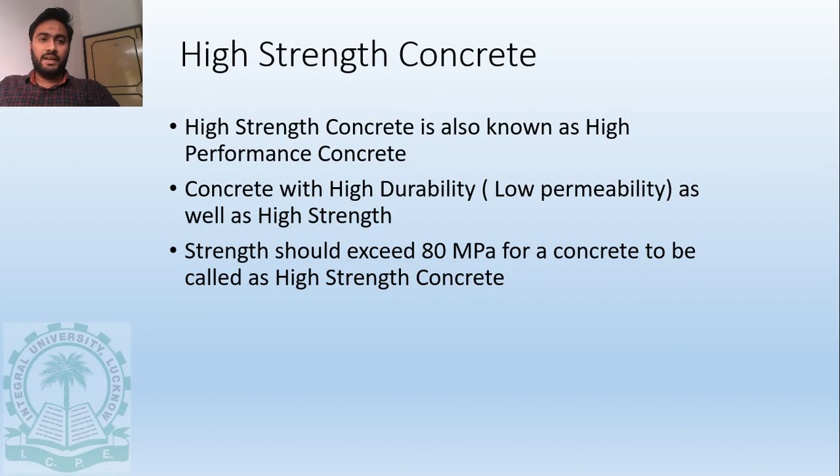So, what is high strength concrete? First of all, high strength concrete is also known as high performance concrete. So, concrete with high durability as well as high strength is known as high strength concrete or high performance concrete. So to call it as high performance concrete, it should exceed a strength of 80 megapascals. Okay. So the 28-day compressive strength should exceed 80 MPa. Okay.

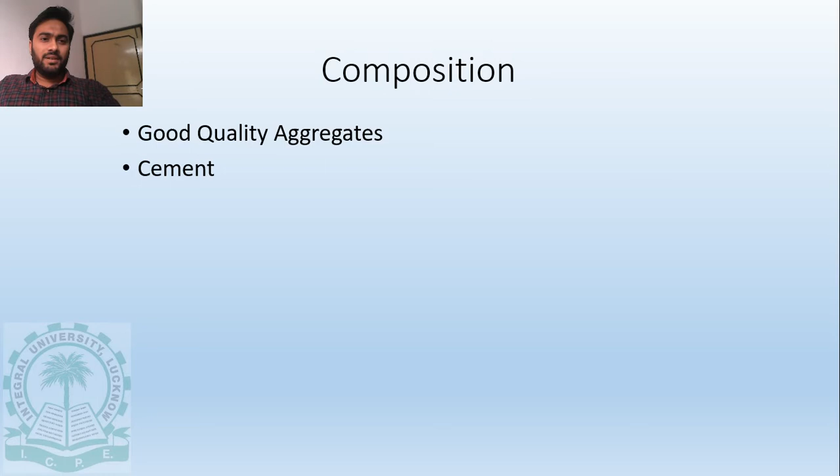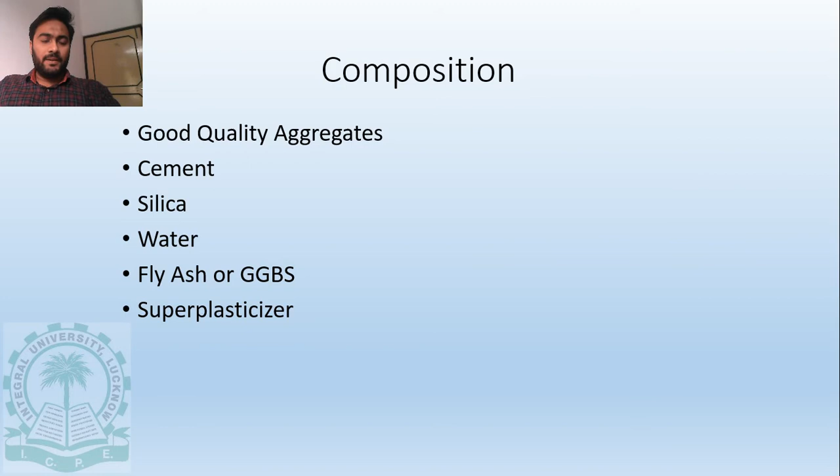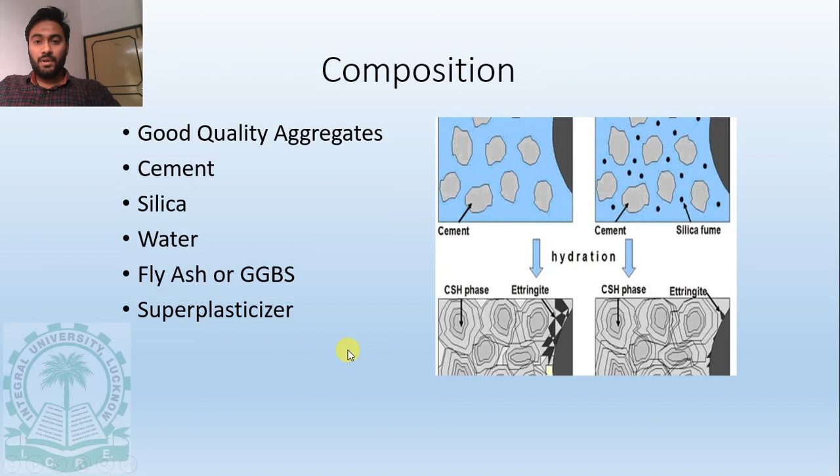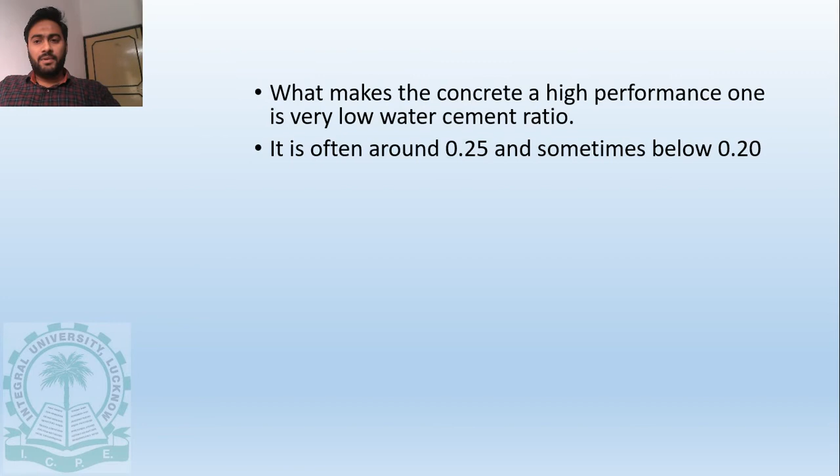the most important thing in such concrete is low water cement ratio. It is often around 0.25 and sometimes below it, also close to 0.20. And for this reason we always use superplasticizers. Okay, this is a kind of admixture we will discuss in unit 4.

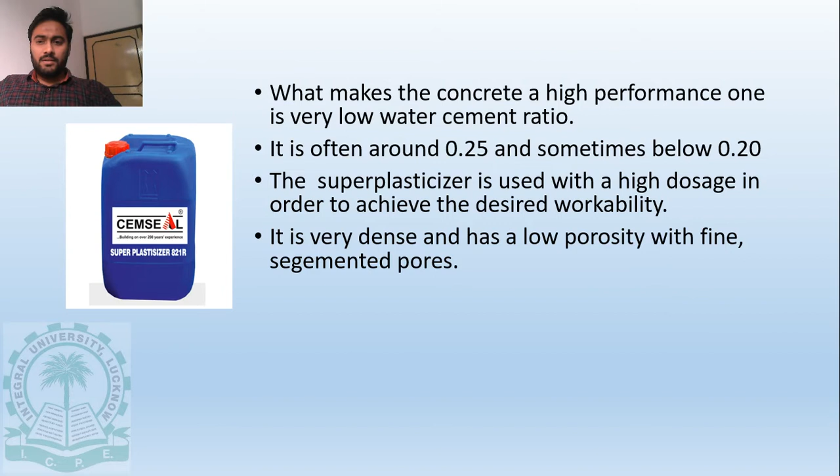Okay, so just understand it, it increases the lubrication of the concrete, so it increases the workability of concrete. As the water cement ratio is very low, the mixing of concrete or the workability is very poor, and to overcome such problems we use superplasticizers. Okay, this is a kind of admixture we will discuss in future classes. So it is very dense and has very low porosity.

Okay, so as you have seen, the water cement ratio is very low and not enough for full hydration of cement. So even after curing in water, a substantial amount of cement remains unhydrated. So even after curing, we have some cement which has not been hydrated, so it is still in cement form.

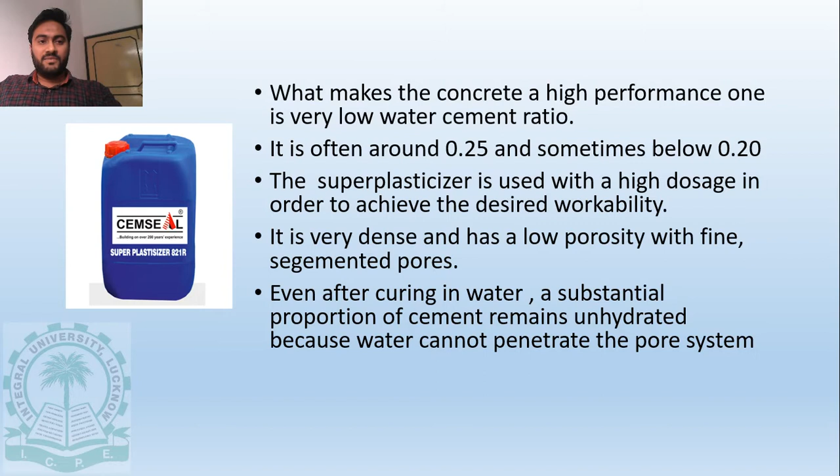So, what are the advantages of such concrete? The first advantage is that concrete column sections can be reduced in size, or if they are not reduced in size, the reinforcement can be reduced for the same size. So if you reduce the reinforcement, you save money, or if you reduce the column section size, you increase the floor area. So in a given room, if the columns are of small dimensions, you will have more area in the room. So obviously, advantages are there.

For example, let's take an example of a city like Mumbai. We do not have the luxury of space there, so we want structures in which very efficient utilization of space can be done. So we can use high performance concrete to have thinner sections of column, so the floor area is increased.

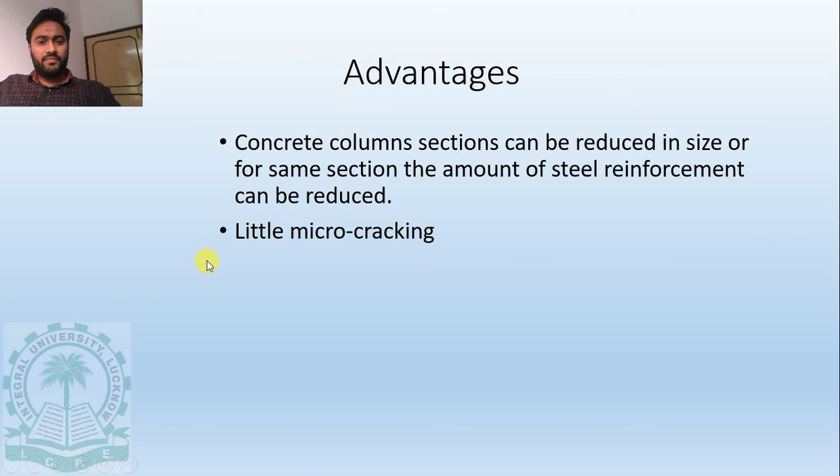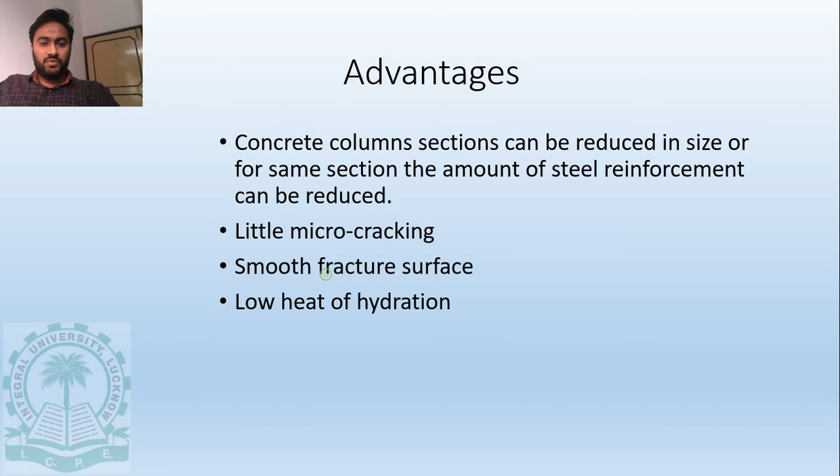So the next advantage is there is very little cracking, and even the fracture surface is very smooth. If you break it in two parts, the two surfaces exposed are very smooth. The heat of hydration is low. There is low bleeding and plastic shrinkage, and obviously because of these factors, the durability is very high. Okay, the structure will last for a longer time.

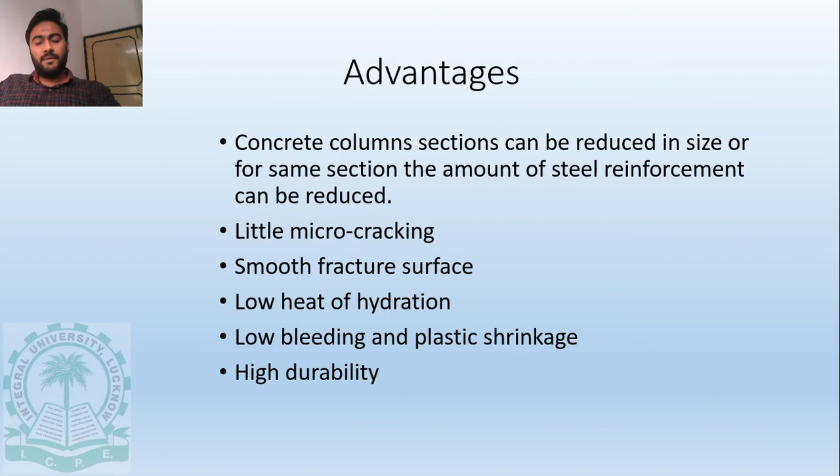So the next topic we have is fiber reinforced concrete. For short, I will be calling it FRC. So you can see FRC, fiber reinforced concrete. So it is made up of hydraulic cement, aggregates and discrete reinforcing fibers.

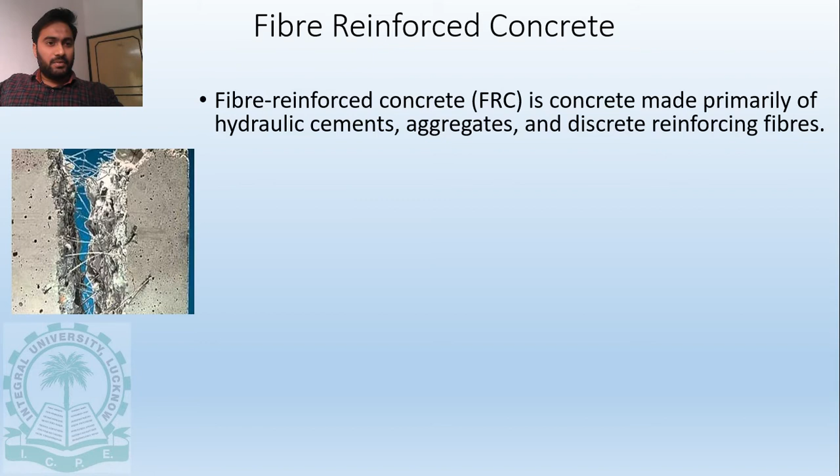Discrete reinforcing. So for example, in this sample, you can see this is the cement and aggregate thing, and then we have very small fibers here. Okay, this is called discrete. Okay, not in a proper shape, very randomly distributed and small in shape. This is called discrete particles.

So these fibers can be of different materials. For example, we have steel, glass, organic polymers, and even synthetic fibers we can use. Okay, so steel, you have to remember here, we already use steel as reinforcement in our beams and columns, and you will be studying RCC, reinforced cement concrete, in your next semester.

But this is not the steel which we are talking about. This is different steel we are talking about. I will just discuss in the next slide how it is different from the reinforcement we use in beams and columns. So naturally occurring fibers, for example, asbestos, vegetable fibers. Then we have jute. They can be used as reinforcement. Obviously, the mix is always cement mortar for the base material.

So if you use such fibers in a proper way, I say proper because you cannot use it above a certain proportion. So it's not that the more fiber you use, the better the structure. It is not like that. Up to a certain limit, the strength can be improved. After that, if you use the fiber, the advantages start decreasing. Okay, so if used properly, they can give long-term serviceability and other benefits also. Okay.

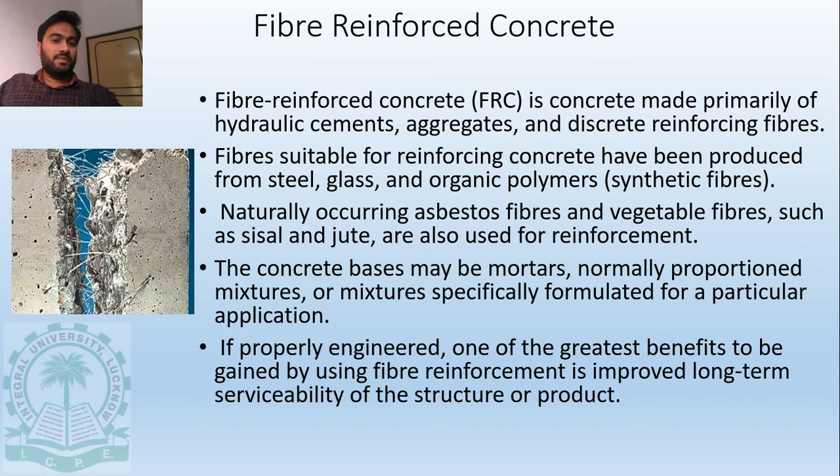So what is serviceability? You will again study this concept in your RCC, the serviceability of a structure. Let's say, for example, for how long the structure can be used, or it provides you essential value, for how long it is valuable. So if it cracks after a certain time, or it fails after a certain time, then it is not serviceable. Okay, so you will learn about these things in your next semester.

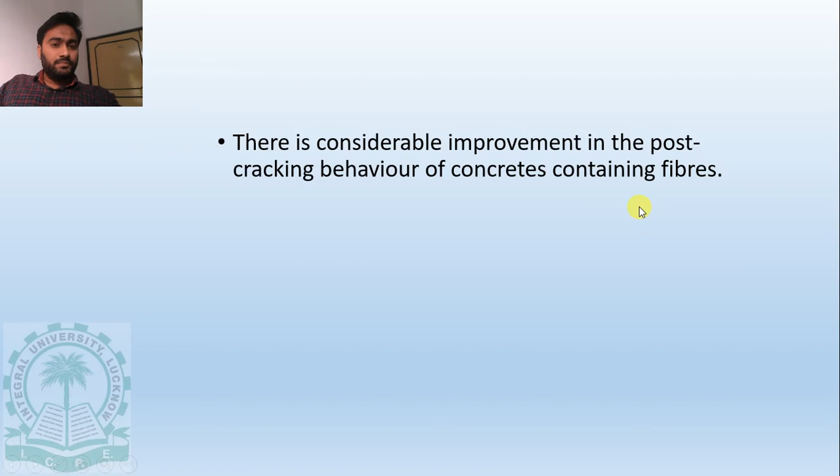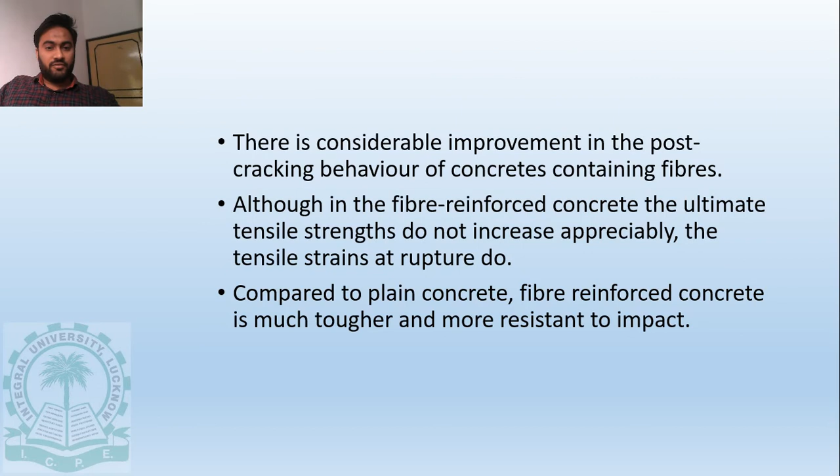So what we see is that using concrete fibers, there is improvement in post-cracking behavior. As you know, cracks will appear when you are using concrete due to shrinkage and creep. But post-cracking also, concrete having fibers has a better behavior compared to concrete not having any fiber. The point here is, they do not improve the ultimate tensile strength, but they do improve the tensile strain. Okay? And the structure is more impact resistant and tough compared to normal concrete.

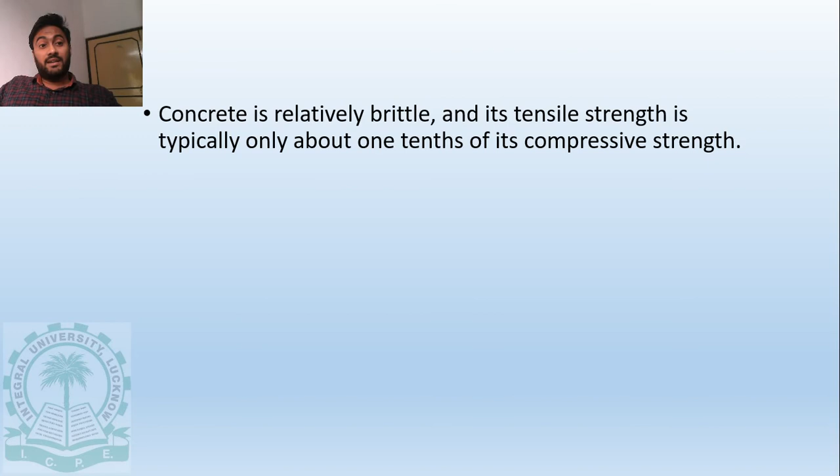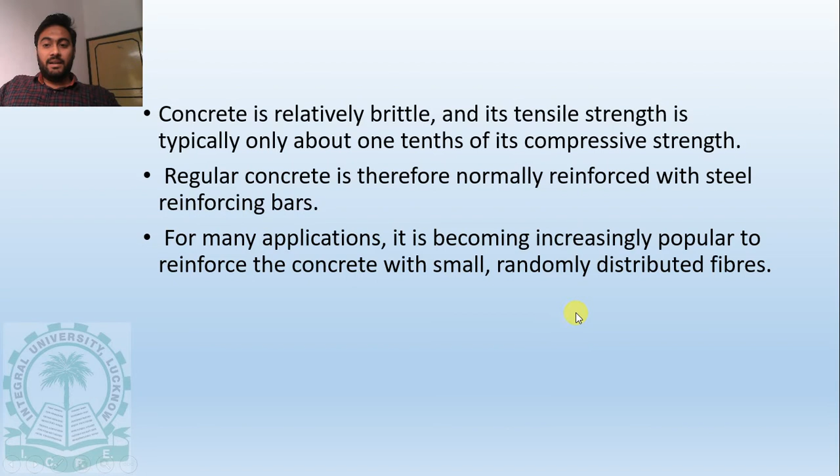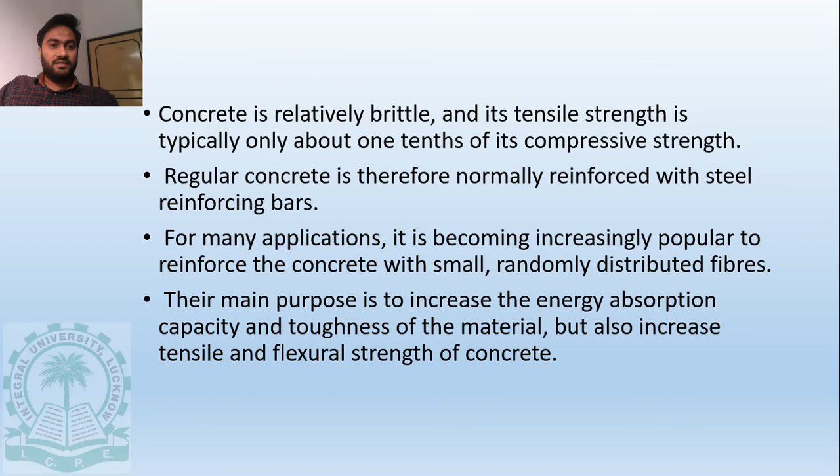So as we know, concrete is a very brittle material, and it is primarily used for its compressive strength, not its tensile strength. So usually we use steel bars for tensile strength, so that's called RCC. But if you use these steel elements or glass fibers in a randomly distributed manner, then even the tensile strength can be improved up to a certain limit, obviously. And the main purpose here is energy absorption. So toughness is the main idea behind the use, and obviously tensile and flexural strength do improve, but the main advantage is toughness.

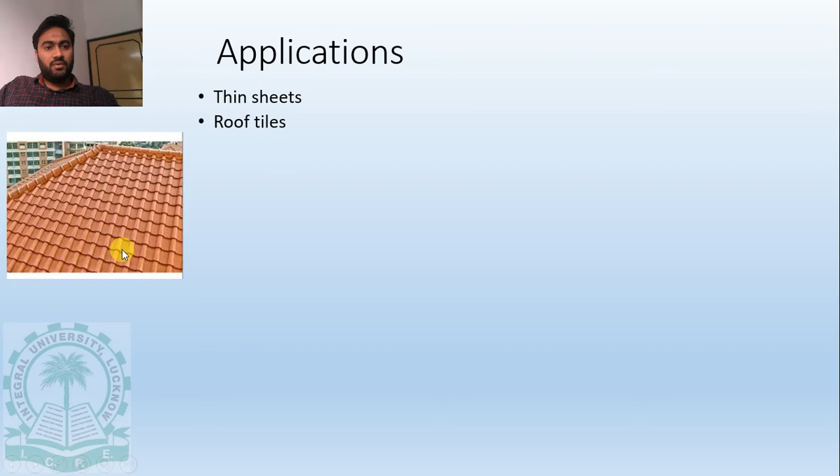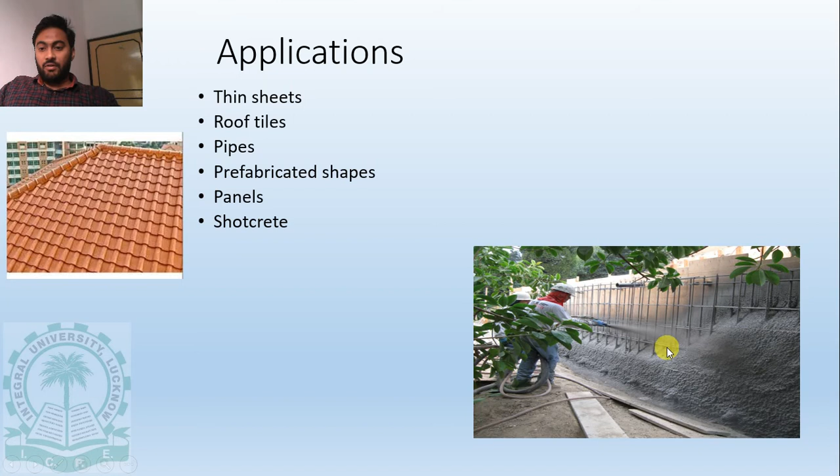So for applications, we can use such concrete in thin sheets, roof tiles. They are very durable. Then we can use it in pipes, prefabricated shapes, panels, shotcreting. So what is shotcreting? If you see in this figure, this is a retaining wall being constructed by spraying concrete over the reinforcement. This places as well as compacts the concrete, and it is very suitable for structures which are vertical in shape. So this concept is called shotcrete or shotcreting.

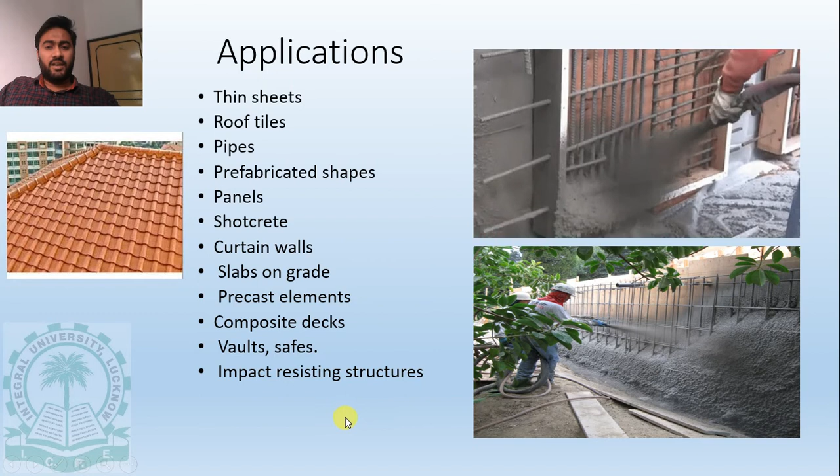It can be seen in tunnel linings. If you see projects in hilly areas, they use shotcreting for tunnel lining. Then we can use it as curtain walls, slabs, precast elements, composite decks, vaults, safes, and impact resistant structures. Okay, so these are the applications of FRC, or fiber reinforced concrete.

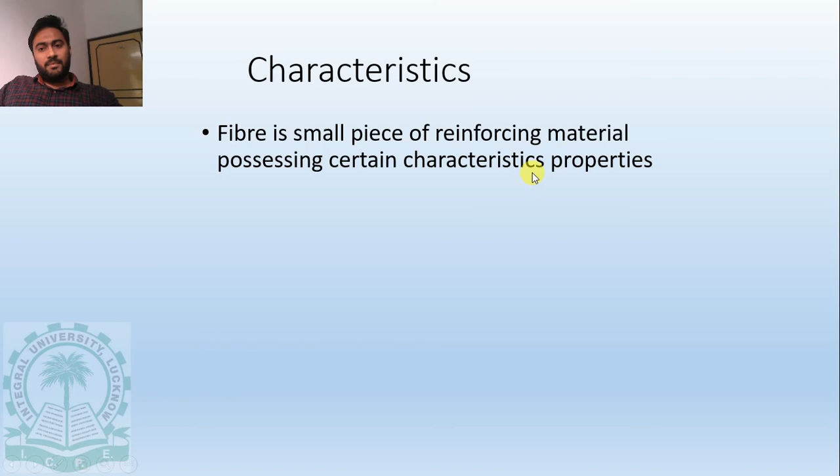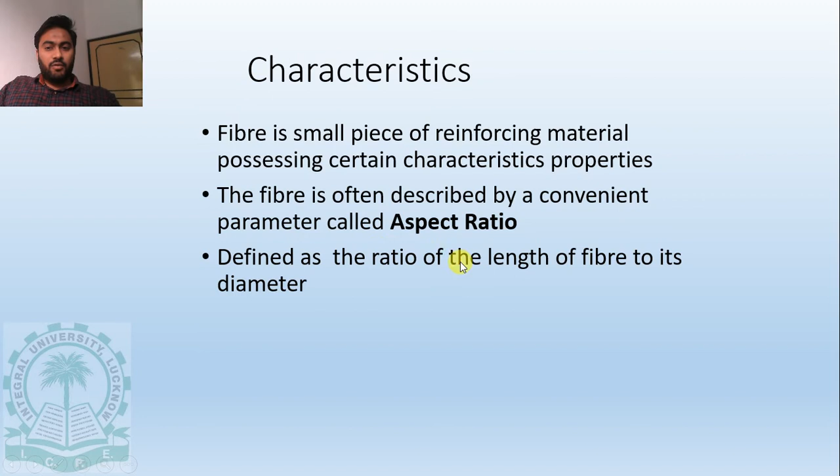So for the fiber now, what is fiber? Fiber is a small piece of reinforcing material possessing certain properties. So how would we define the parameter? The fiber is often described by a convenient parameter called aspect ratio. So what is aspect ratio? It is defined as the ratio of the length of the fiber to its diameter. It usually ranges from 30 to 150. And steel fiber is the most commonly used fiber. Okay.

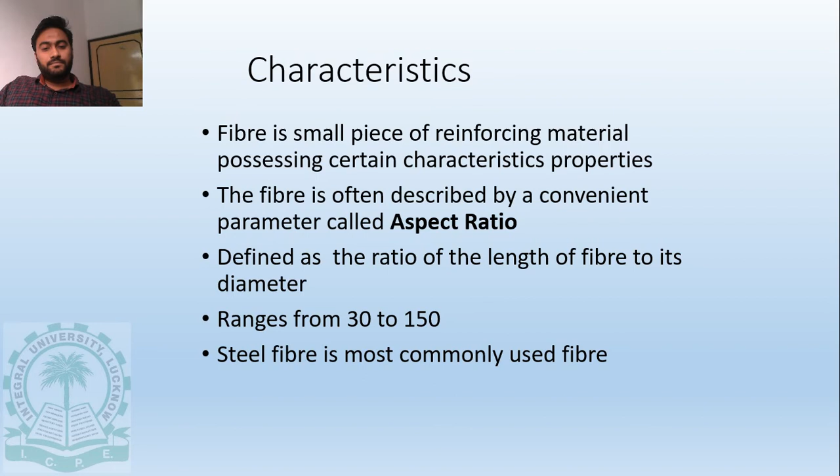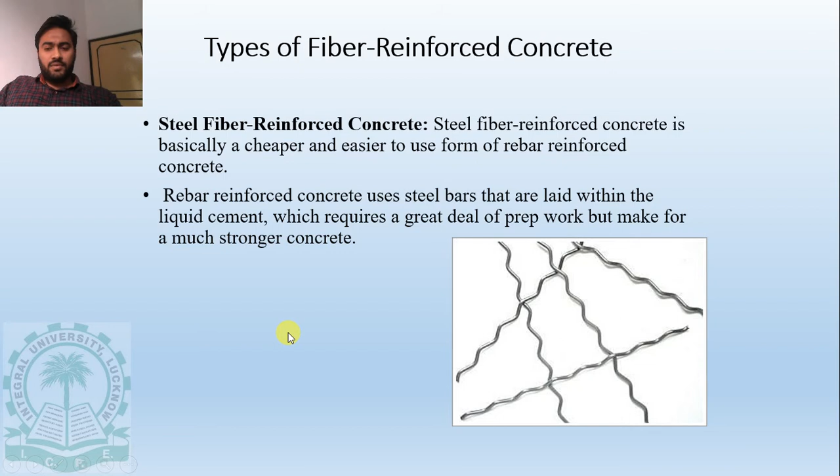So again, as I told you, steel is the most commonly used fiber. So this is the shape I was talking about. We do not use steel as you have seen in steel bars. That is a different thing. That is reinforcement, RCC. But using steel in random small parts. This is the shape I was talking about when you use steel as fiber. Okay. So obviously it improves a lot of characteristics of concrete.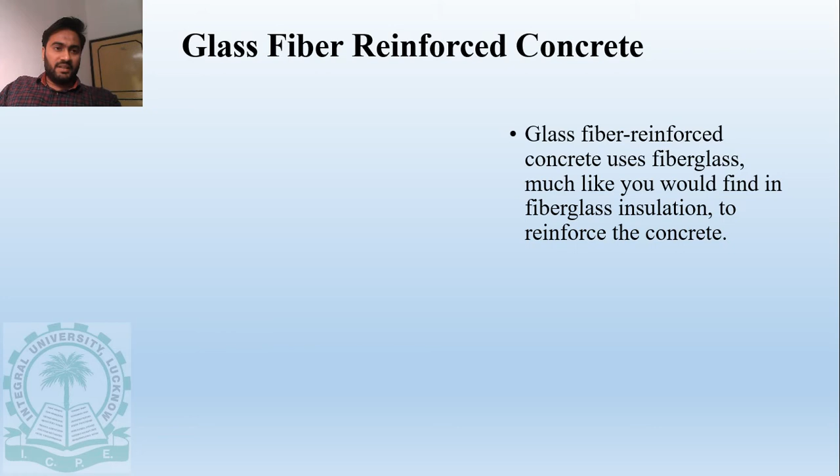Then we have glass fiber reinforced concrete or GFRC. So we use fiberglass materials in small particles, or sometimes sheets like this. This is a GFRC sheet. You can see. So primarily they are used in cladding of buildings. So in this building you can see this is the material used. GFRC is used here for cladding of the building.

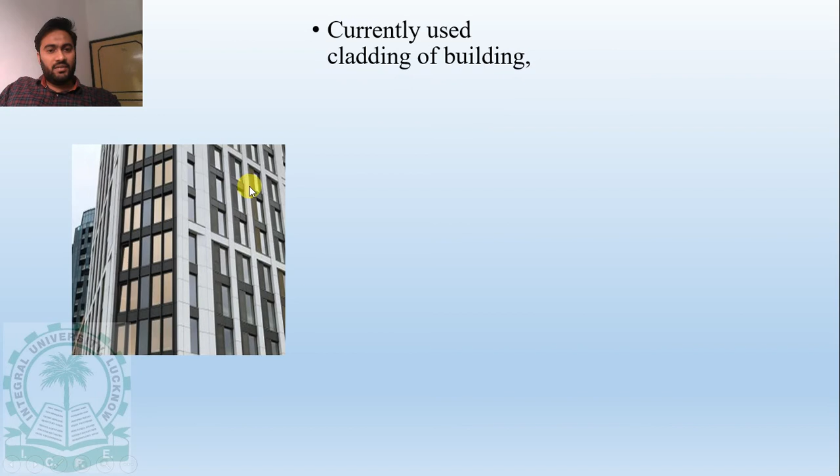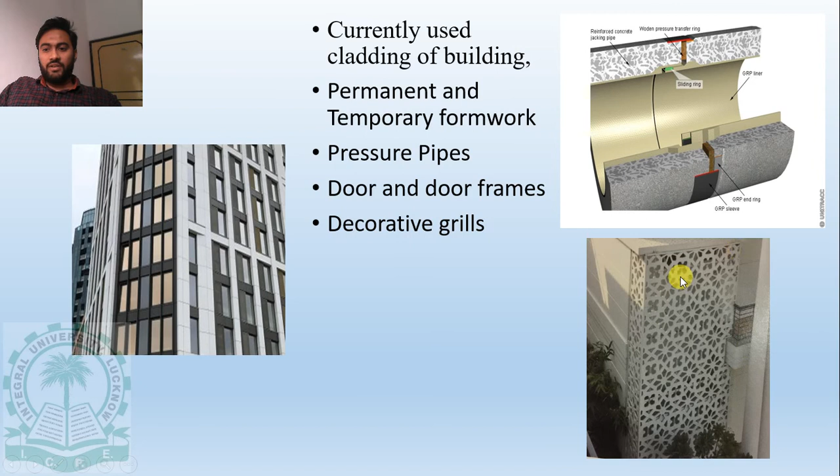Then we have permanent or temporary formwork, pressure pipes. The inner lining of pressure pipes can be made up of GFRC. Then we have doors and frames. Then we have decorative grills. You must have seen buildings having such kind of structure. These are called decorative grills and they are made up of GFRC. They are commercially available; if you check on Google, they will give you a rate at which it is available. So this is currently being used in the construction industry. Then we can construct bus shelters, park benches. So these are some of the uses of GFRC.

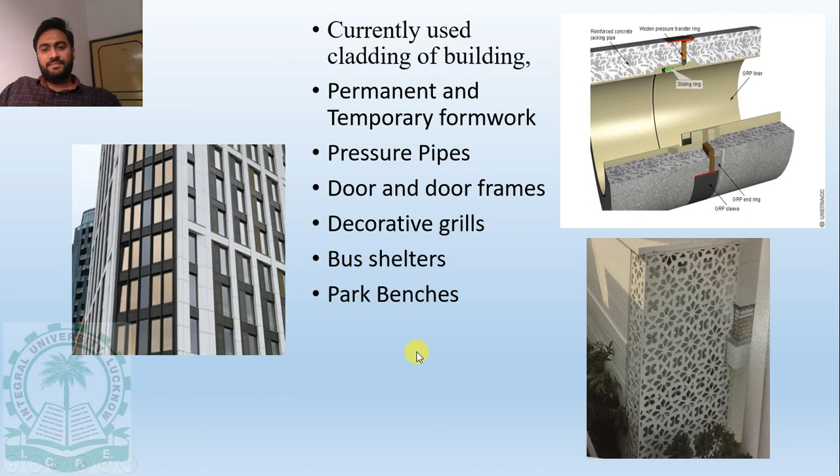So in place of steel or glass, you can use synthetic fibers also. Okay. So this is a synthetic fiber, nylon or some other material, and this is the raw form which is being used, and then you see how it is added in the concrete. This is one of the cross sections of the member where this has been used.

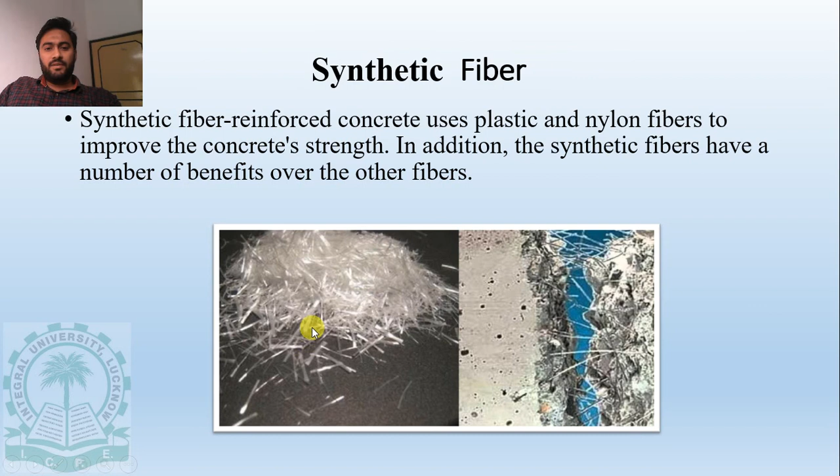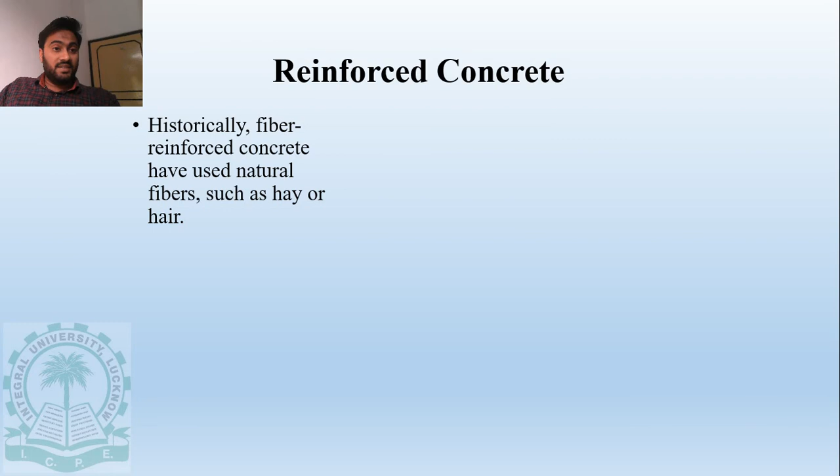So historically, fiber reinforced concrete has been used before RCC. It has been used in past times also, but currently it can be used in all the elements of the structure. Okay, but you have to keep in mind that it cannot be used beyond a certain limit, which we will discuss in future classes. What is that limit and how does it impact? And a lot of research has been done in the department using fiber reinforced concrete. Currently some of the students are working on these things, so you can get in touch with MTech students and have some knowledge about these things.

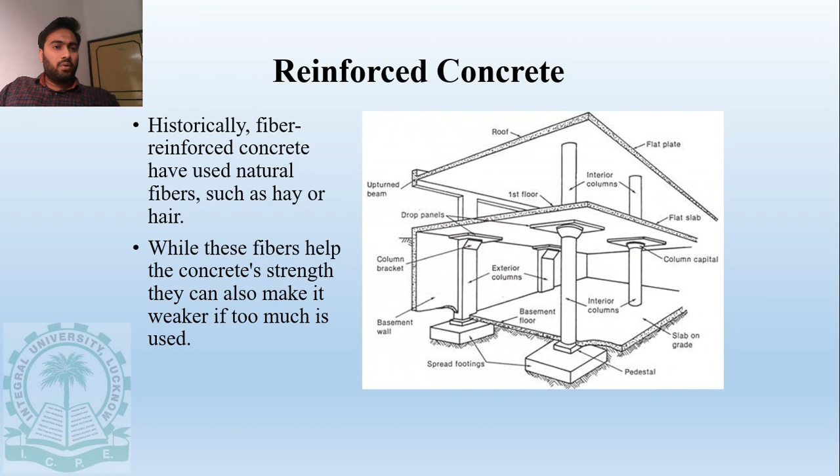But a very simple example you must have seen in your villages or wherever you live: people use husk or hay in mud, making some mud structures, like pots and all those things, to give it some strength. So technically, that is the concept being used in concrete. So it is an old concept, but now being used in concrete also.

So in recent development, we have high fiber volume microfiber systems, slurry infiltrated fiber concrete, SIFCON, compact reinforced composites. So these are some of the fields which are being worked upon. And if you are interested in concrete technology, or if you pursue a career in this field, or in research, you will obviously face these things, and this is some of the current research and development going on in this field.